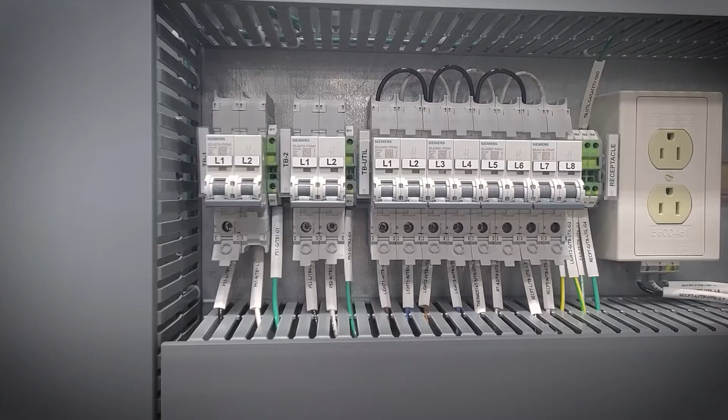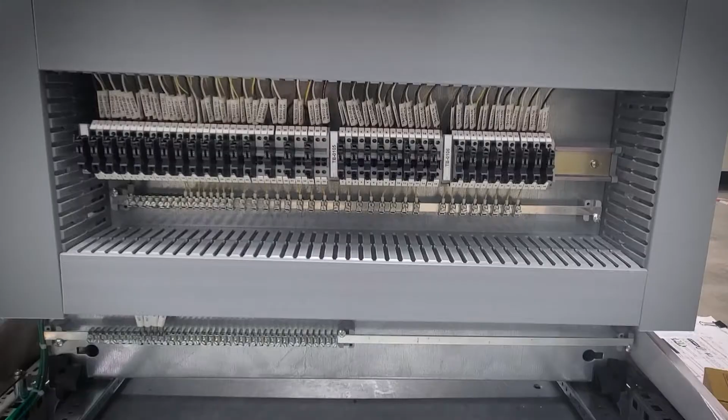I am a project engineer for RAN Technologies. We're based in Houston, Texas, and we are a control panel manufacturing and system integrator. At RAN, we are extremely focused on ensuring that every little detail and every panel and every enclosure is exactly to our customer's specifications. We ensure that every component, sometimes we deal with extremely delicate components or very precise

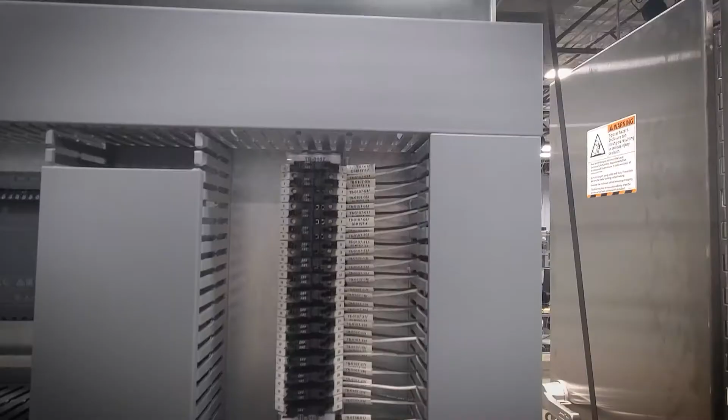components, and we make sure that those components are treated in the way that our customer expects them to be treated. And we make sure that the end product is executed with the vision that our customers expect it to be. We deal with a lot of big companies with very high expectations, and we always fulfill those expectations. We go above and beyond those expectations, regardless of how big or how small a project might be, because when it comes to our reputation, we definitely take that extremely seriously.

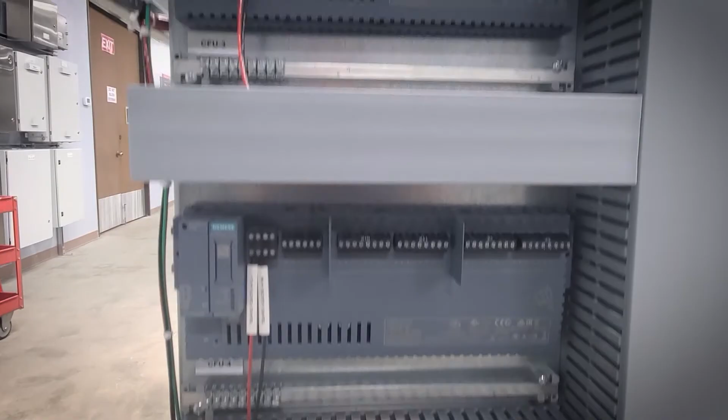We provide services for all different types of industries, whether it's oil and gas, or energy and power, or food and beverage, the automotive industry, biomedical industry, the aerospace industry, chemicals industry. We provide services for all of them, and we have the capabilities to ensure that regardless of what industry we're servicing, we are able to provide a great final product for all of them, because at the end of the day, our specialty is in building control panel systems, regardless of where the end user is or what type of industry that end user is in. We are very specialized in the product that we produce.

Michael, how did you know that you needed EPLAN? So at RAN, we're always looking for the next big innovation. We're always looking in the future of what's going on in the industry. And when we discovered EPLAN, when we realized what its capabilities were, we realized that we need to differentiate ourselves with some new software. So we realized that EPLAN gave us the perfect opportunity to do just that.

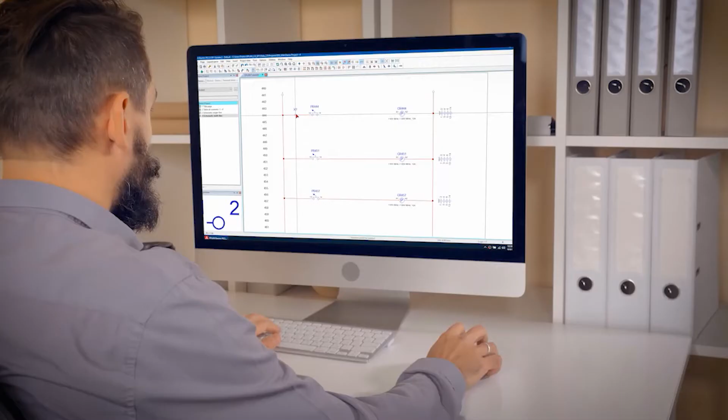What was the catalyst that drove you to start looking at EPLAN? RAN Technologies is always trying to be ahead of the game, ahead of the curve in terms of technological development. So when we heard about the capabilities offered by EPLAN, we really wanted to give it a try, because we know that we want to develop our technology to make our process easier, faster, so that we can better meet our customers' needs.

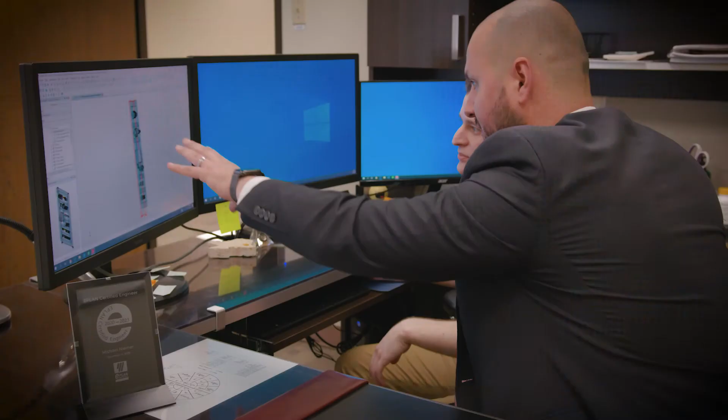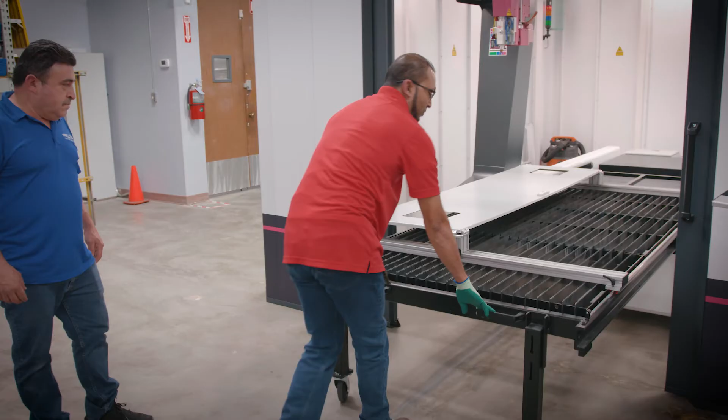EPLAN and RAN Technologies have known each other for many years. Please tell us a little bit how that partnership began. When EPLAN first started in the US, they were looking for shops such as RAN Technologies who were looking for new technology, and EPLAN was trying to introduce themselves to the US market. And they reached out to us, told us a lot about the capabilities of EPLAN, and I was really excited about all the technological advances that EPLAN could offer us in terms of the 3D modeling that we could apply to the equipment that we're building, in terms of a seamless transition from the software onto our production floor. So we liked all those features and we wanted to learn more.

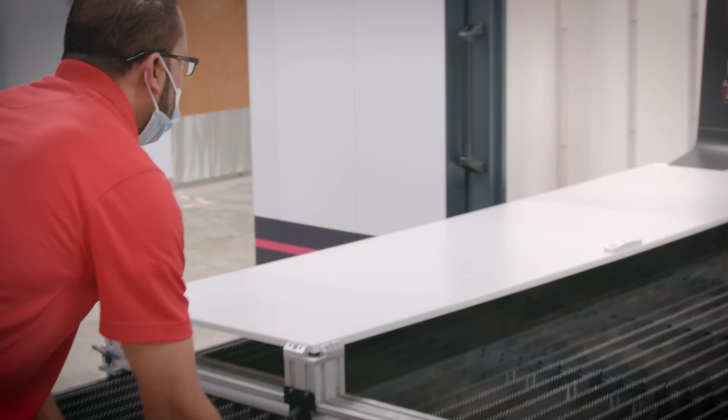We were the second company in the United States to have a Kiesling machine, which is the predecessor for the Perforex CNC milling machine. We are also the second company in the United States to have the laser cutting Perforex machine. Through our long-standing relationship with Rittal, we discovered EPLAN and all the capabilities that come along with it, which is why we decided we needed to partner with EPLAN.

Tell us a little bit about your engineering workflows before EPLAN. Previously, we had many redundancies in our engineering process. When it comes to enclosures, if one single enclosure has a different part, you have to generate a whole new bill of materials. And with our previous workflow, we would have to do that individually for every single enclosure. With EPLAN, using the Data Portal, we can just pull any part that we might need, and it'll automatically generate it for us, which removes that whole manual process.

We talked about how the workflow was before EPLAN. Now that you have EPLAN, how has that changed? At RAN, we're always trying to maintain our high standards. And with EPLAN being thrown into the mix, we realized that we could enhance those high standards by implementing EPLAN's data and data-driven approach into our manufacturing process.

So because we have such a great relationship with Rittal and we're invested in their Perforex machines, we can use EPLAN to go from point A, we can draw a cutout in EPLAN, and we can send it directly over to the machine being point B and make a very precise, high-quality cutout just using that. And introducing that into our workflow is invaluable.

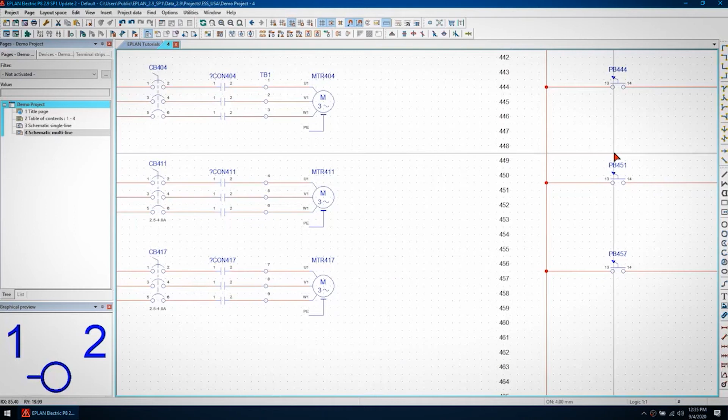We're trying to enhance that even more, trying to improve that every day, trying to differentiate ourselves from the competition. Using EPLAN, we can maintain our high manufacturing standards and quality control throughout the manufacturing process.

Has there been an outcome of EPLAN that you did not expect? In the beginning, I was expecting it to be all about the feature set and all the features that it had, but in actually using and participating in EPLAN, I realized that the amount of support that they give us is invaluable. I mean, you can't go to another big software solutions company and start knocking on people's doors and asking for help. But with EPLAN, we can. We have such a close partnership with them that we're able to ask for whatever we need, and we have their full support.

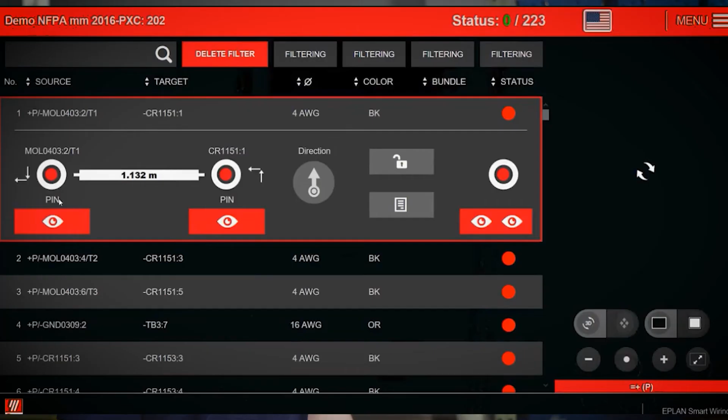Have you been able to see an impact on the shop floor? Yeah. We have been able to see it just from the data handover process. The fact that we can hand over the data from our engineering section to the manufacturing section and do it quickly and seamlessly is invaluable. We are able to implement certain software solutions through our wiring process to cut down on our most time-consuming process, which is wiring.

As with any new technology, there can be some challenges. Has that impacted you at RAN, and how have you been able to resolve it? Well, when you're implementing any new technology, there's always hurdles to overcome. But with EPLAN, because I had the foundational knowledge that I had through the ECE program, and also I had the support of staff from EPLAN, I was able to overcome all of those challenges. It's a very difficult balancing act, maintaining high standards in manufacturing while also implementing new technologies. But because of that support that I had, I was able to overcome all of those hurdles.

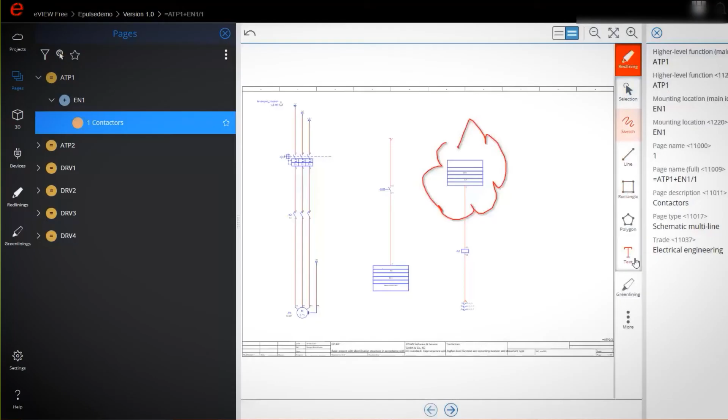How have you utilized some of EPLAN's cloud technologies? The standout feature in our eyes is the EPLAN data portal. The embedded data within EPLAN means it's much easier for us to pull data from those parts producers, keep it reliable, and also use it in our designs.

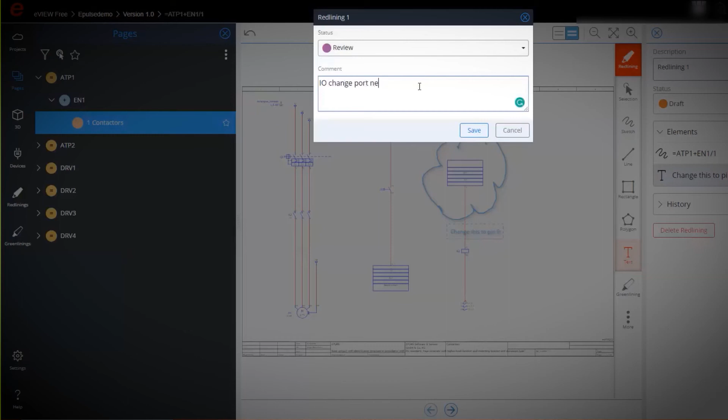eView will help us collaborate both internally and externally with our customers by enabling us to exchange red lines, change orders, much more quickly and efficiently than just emailing PDFs or bulky papers and delivering those physically. This is a way for us to really move with the future and allow us to streamline our engineering design process. Thank you so much for your time today.

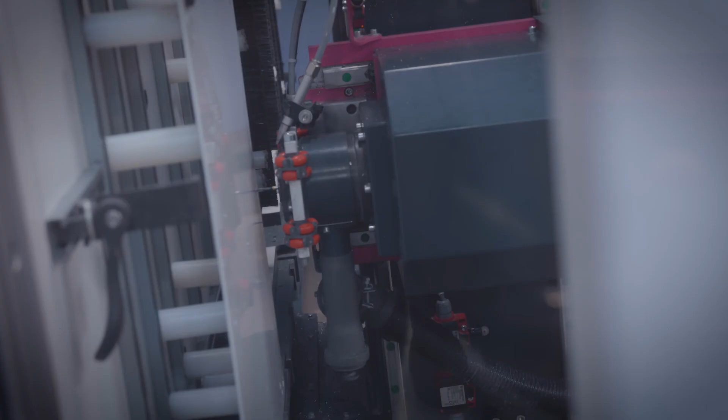I do have one last question. What's the vision here, and what are the next steps? RAN Technologies has already established the process from EPLAN into our CNC machine and the laser cutting machine. So our vision forward is to use the EPLAN module for wiring to automate that process. We're constantly looking for new ways that we can automate our manufacturing and our engineering processes. And through this partnership with EPLAN and Rittal, I believe we can achieve that.

Whether it's implementing these current day solutions, or depending on what maybe gets invented in the future, or however we can apply whatever new technologies are being developed, I see those all as great ways that we can bring ourselves above the competition and keep pushing, keep looking for new ways to differentiate ourselves.